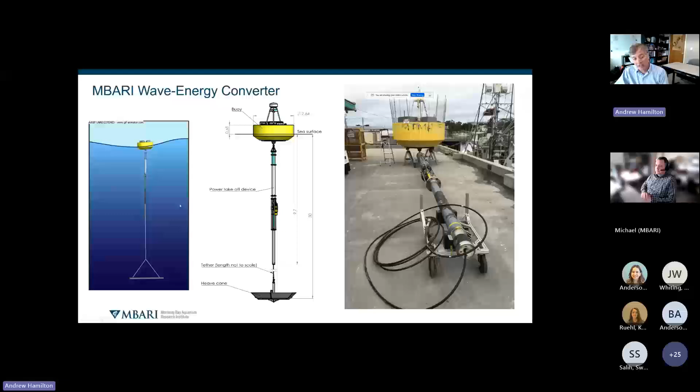In operation, it looks like this very rudimentary cartoon on the left. Waves are coming, bouncing this thing around. The downstairs plate, the heave cone, isn't moving too much. This differential motion and force in and out represents the mechanical prime mover of the system, which through many steps gets converted to electricity.

By comparison, I hinted at this earlier: this buoy on the left is a solar buoy we built here in the 2000s, maybe late 2000s, where we packed on this size buoy as much solar panel and wind turbine as we could. That turns out to be about a 5,000-pound system and about 50 watts. This wave energy, the WEC prototype we're talking about here, is also about 5,000 pounds and is 200 to 300 watts on average. So there's your 5x increase in energy capture.

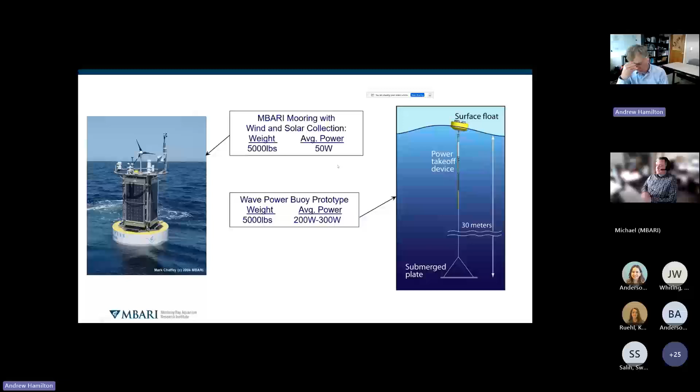And of course, you pay for it in complexity, not particularly cost. It's nothing too expensive here, but the deployment's complicated and it's a little harder to maintain. So that's the promise of wave energy: you can generate significantly more power with the same amount of hardware. When you start talking about recharging autonomous underwater vehicles, 100 to 200 watts is the point where it starts to become possible. If you're in a solar-powered system with 30 to 50 watts, you're really quite limited in what you can do in those vehicles. Talk about that more later.

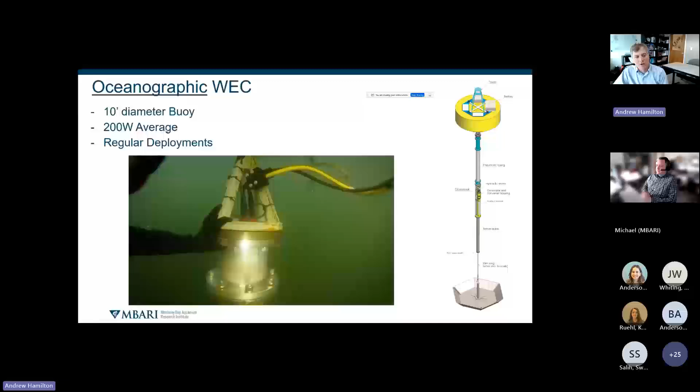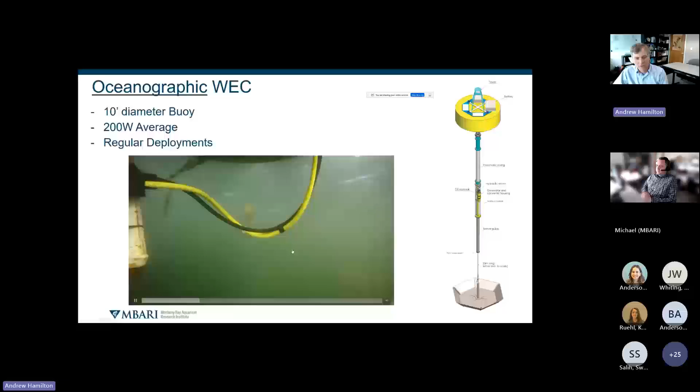Anyway, this wave energy converter is about 10 feet in diameter, 200 watts average. We do regular deployments of this system. Here's a little video of the divers. I'm not going to play the whole thing, it's a little long, but it'll give you an idea of the system. It's kind of industrial looking. There's one of our engineers, who's also our diver, doing an inspection. There's the buoy, and they're going down just to make sure everything's fine.

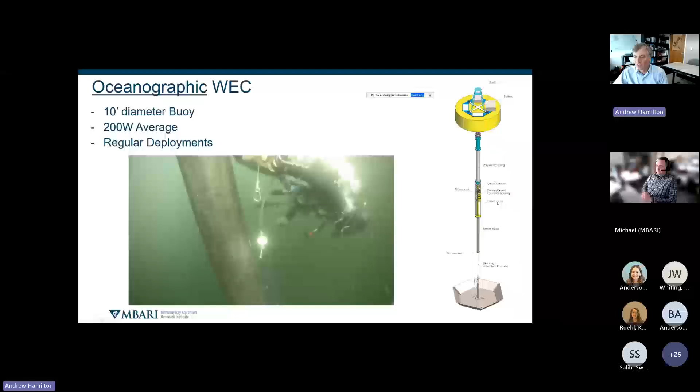And you can see the buoy here on the surface, this diagram on the right. Again, I mentioned the pneumatic spring, an important element, and then this generator and converter and the hydraulic motor and the hydraulic system. So there's two components in parallel, and then this heave cone down here. So there you can see those components as they dive down. Check out the jellyfish there.

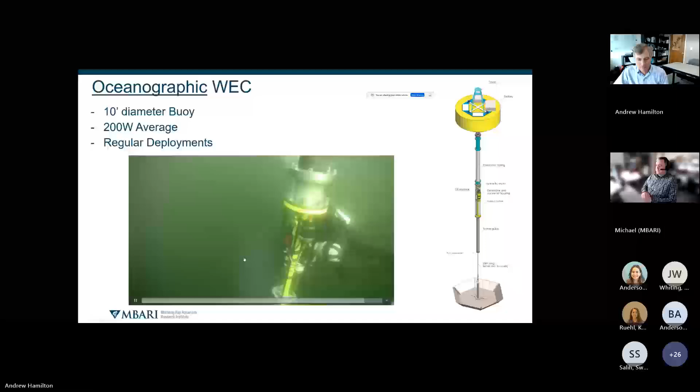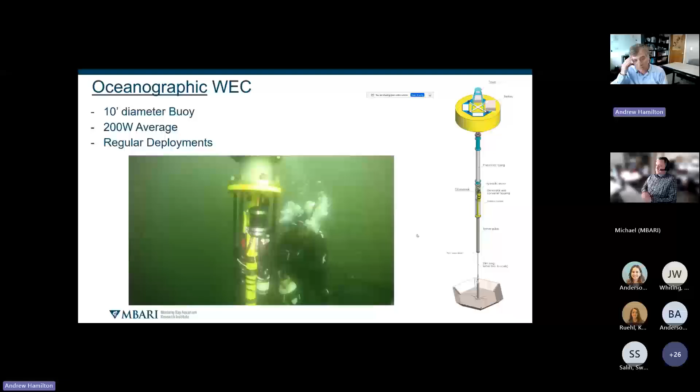Yeah, so it looks like that hadn't been in the water very long on this inspection dive, because after 6 or 8 months, it's just totally caked in growth and you can't really see all that stuff. It's just a big seaweed wad, but that doesn't bother it - if the seaweed's kind of neutrally buoyant, it doesn't really get in the way of its performance.

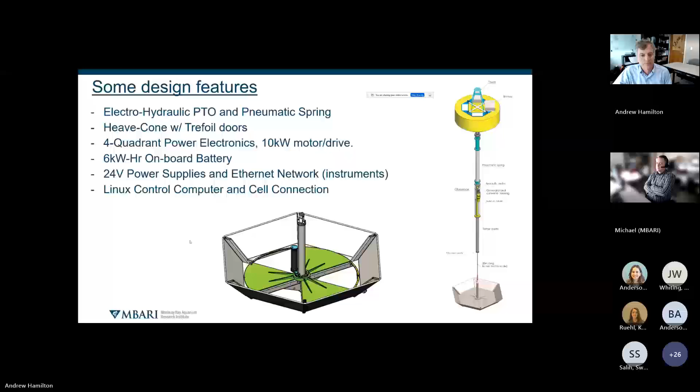Yeah, so wave energy is very difficult. When you're talking about a year deployment, you're talking 3 to 5 million wave cycles, and that piston is going in and out every wave cycle, and it's kind of nuts. If you add it all up, how many meters or centimeters it strokes in and out, you're talking several million meters of linear travel of that rod, if you count it back and forth.

And finally, and we're going to talk about this relative to the control part of this, wave energy devices are really odd in that we are designing them to maximize the forces, which really is a problem when the big storms come. The situation is that the wave speed doesn't change. You can't really control that. So if you want to capture more energy, all you can do is increase the force, and it means that the forces are very large in these systems.

Speaking of control system, the system out there right now, in its absolute default, does a very simple control approach, and that is that it applies a force on the power takeoff device that is proportional to the RPM of the motor. So it's following this program curve, and it's sort of a piecewise linear thing. It looks a little funny. There's a reason it's that shape.

But in any event, at any given moment, what that computer out there is doing, the microcontroller that controls the power converter, is it's looking to see how fast the motor's spinning. It says here, oh, 2,000 RPM. So therefore, I better be exerting minus 10 amps of winding current. So it's always, by default, opposing the motion of the spinning motor, and that is the generator mode. It's trying to slow it down, and therefore that means it's absorbing power.

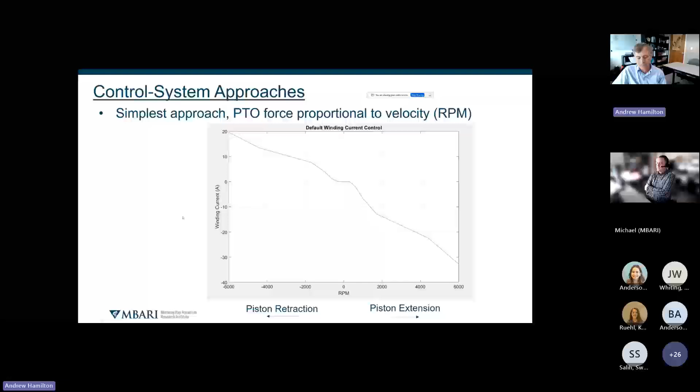The alternatives, of course, are much more sophisticated model predictive control type things that are really exciting ideas, and have the opportunity to make the device smaller, impose stroke constraints on the system, and increase energy capture and robustness. These things are all over the literature in terms of simulation.

But if you do some advanced control, model predictive control in this case, you're going to get potentially a 5x increase in energy capture, which honestly, we don't really need to make more energy for our purposes, but this sort of thing would allow you to make the device smaller and more survivable and easier to deploy and cheaper and all that.

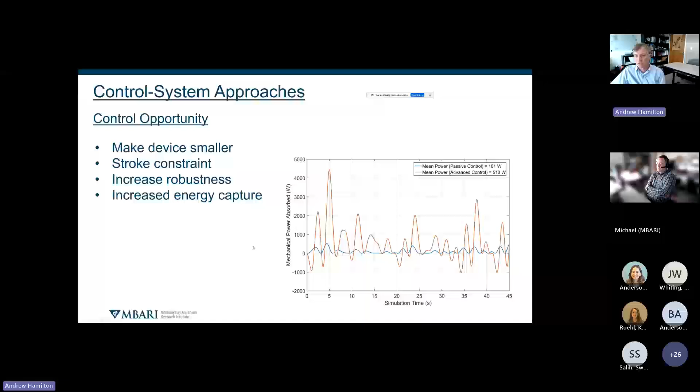Oh yeah, MPC simulation example. So a lot of what this project is about, that's the background. So we're done with that. A lot of what this project is about is to make the wave energy converter that we have out in the ocean available to other people to develop and test this sort of control algorithm.

To do that, we implemented ROS on the Linux computer and provided all the services and data so that a person could write code that we could deploy on the buoy while it's out there without bringing it in and reprogramming it, just like sending it over the cell phone link, and run a new control algorithm based on the measurements happening on the buoy, overriding the default passive linear control I talked about.

So we chose ROS2 to really try to engage a wider group of robotics engineers. ROS is very popular in many robotics areas, and has bindings to Python and of course C++. That was the origin of the choice of ROS, and that's a little double-edged sword in that ROS is a little complicated and takes a learning curve to use, but does have a lot of capability.

I want to back up here slightly and say the reason that's possible is the architecture of this system. There's a Linux computer that lives on the buoy, and then there's these microcontrollers that really make up the heart of the system. Those microcontrollers don't do much - they do the minimum thing and the safe thing.

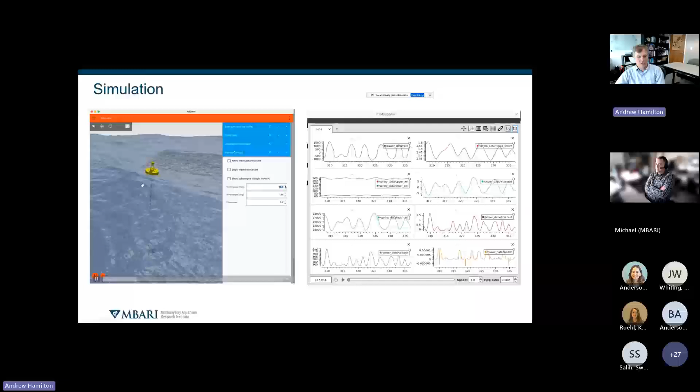So that's made available in simulation, which you can use to cheat, I guess. This is a diagram of the simulator in action. I'm not going to spend a lot of time on this because we're going to run it live in a minute. But it's got other features that come with this type of simulator—fancy graphics and rendering, which are nice to look at. In the end, you don't use them that much.

As I've said, what we really wanted to do is engage the possibility of outside researchers using this platform, and that's where we've kind of struggled. We haven't gotten as many people involved as we would have liked. We got some, and we have some on the horizon. Part of what we're doing today is trying to show this off and spread the word. Anybody on this call is certainly welcome to contribute and get involved. We would love it—or if you know somebody.

We are aware that researchers—like when I got involved personally, Michael Anderson was a ROS expert when he came, but when I got into this, I was new to ROS too. There's a bit of a learning curve, but we've tried to make the system approachable, using the simplest solutions we can. We've built up tutorials and examples, which we're going to go through today, and made easy access using GitHub features, and there's a discussion forum.

Now I'm going to move on—before we get to the simulator and run through those tutorials, we thought we would start with a live demonstration of the buoy software itself. The buoy is at sea right now.

I'm going to go through that, then hand it over to Michael, and he's going to show a little more detail. So can everybody still see my screen?